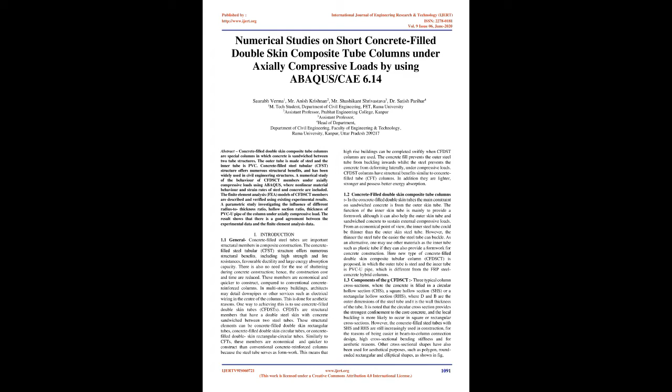Similarly to CFTs, these members are economical and quicker to construct than conventional reinforced concrete columns because the steel tube serves as formwork. This means that high-rise buildings can be completed swiftly when CFDST columns are used. The concrete fill prevents the outer steel tube from buckling inwards whilst the steel prevents the concrete from deforming laterally under compressive loads. CFDST columns have structural benefits similar to concrete-filled tube, CFT, columns. In addition, they are lighter, stronger, and possess better energy absorption.

1.2 Concrete-filled double-skin composite tube columns. In the concrete-filled double-skin tubes, the main constraint on sandwiched concrete is from the outer skin tube. The function of the inner skin tube is mainly to provide a formwork, although it can also help the outer skin tube and sandwiched concrete to sustain external compressive loads. From an economical point of view, the inner steel tube could be thinner than the outer skin steel tube. However, the thinner the steel tube, the easier the steel tube can buckle.

As an alternative, one may use other materials as the inner tube, such as plastic tube, if they can also provide a formwork for concrete construction. Here, a new type of concrete-filled double-skin composite tubular column, CFDSCT, is proposed, in which the outer tube is steel and the inner tube is PVC-U pipe, which is different from the FRP steel-concrete hybrid columns.

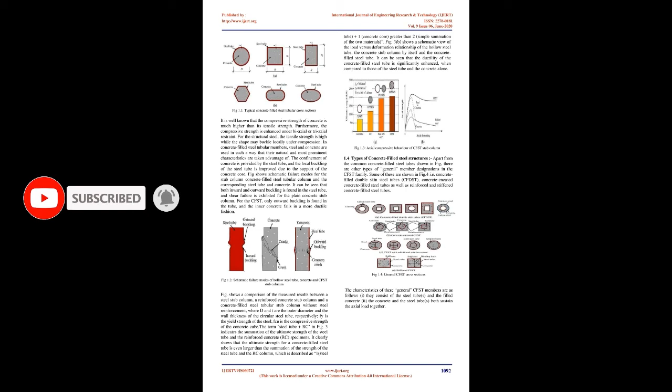1.3 Components of the CFDSCT. Three typical column cross-sections, where the concrete is filled in a circular hollow section, CHS, a square hollow section, SHS, or a rectangular hollow section, RHS, where D and B are the outer dimensions of the steel tube and T is the wall thickness of the tube. It is noted that the circular cross-section provides the strongest confinement to the core concrete, and local buckling is more likely to occur in square or rectangular cross-sections.

However, the concrete-filled steel tubes with SHS and RHS are still increasingly used in construction, for the reasons of being easier in beam-to-column connection design, high cross-sectional bending stiffness, and for aesthetic reasons. Other cross-sectional shapes have also been used for aesthetic purposes, such as polygon, round-ended rectangular and elliptical shapes, as shown in Fig.

It is well known that the compressive strength of concrete is much higher than its tensile strength. Furthermore, the compressive strength is enhanced under biaxial or triaxial restraint. For the structural steel, the tensile strength is high while the shape may buckle locally under compression. In concrete-filled steel tubular members, steel and concrete are used in such a way that their natural and most prominent characteristics are taken advantage of.

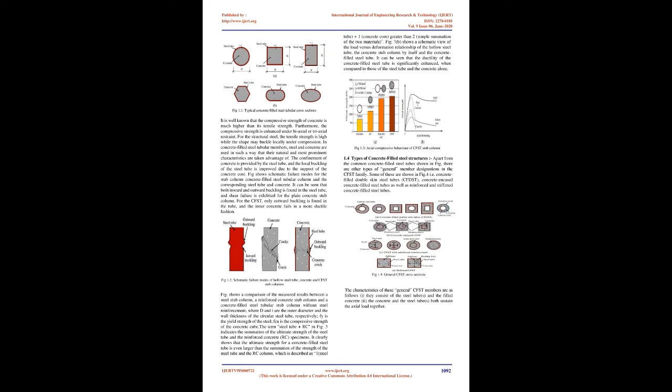The confinement of concrete is provided by the steel tube, and the local buckling of the steel tube is improved due to the support of the concrete core. Fig shows schematic failure modes for the stub column concrete-filled steel tubular column and the corresponding steel tube and concrete.

It can be seen that both inward and outward buckling is found in the steel tube, and shear failure is exhibited for the plain concrete stub column. For the CFST, only outward buckling is found in the tube, and the inner concrete fails in a more ductile fashion.

Fig 3 shows a comparison of the measured results between a steel stub column, a reinforced concrete stub column and a concrete-filled steel tubular stub column without steel reinforcement, where D and t are the outer diameter and the wall thickness of the circular steel tube, respectively. fy is the yield strength of the steel, fcu is the compressive strength of the concrete cube.

The term steel tube and RC in Fig 3 indicates the summation of the ultimate strength of the steel tube and the reinforced concrete, RC, specimens. It clearly shows that the ultimate strength for a concrete-filled steel tube is even larger than the summation of the strength of the steel tube and the RC column, which is described as 1 (steel tube) plus 1 (concrete core) greater than 2, the simple summation of the two materials.

Fig 3b shows a schematic view of the load versus deformation relationship of the hollow steel tube, the concrete stub column by itself and the concrete-filled steel tube. It can be seen that the ductility of the concrete-filled steel tube is significantly enhanced, when compared to those of the steel tube and the concrete alone.

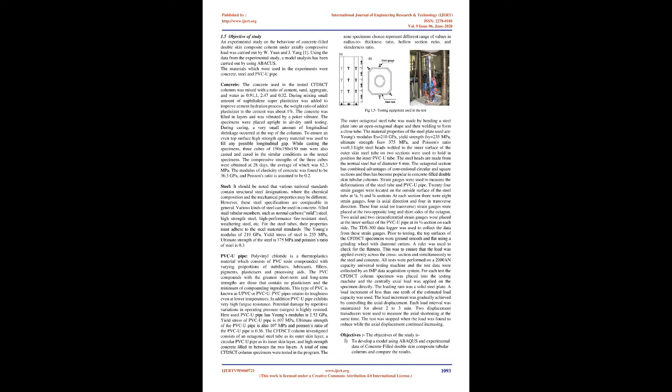Concrete. The concrete used in the tested CFDSCT columns was mixed with a ratio of cement, sand, aggregate, and water as 0.91, 1, 2.47 and 0.32. During mixing, a small amount of naphthalene superplasticizer was added to improve the cement hydration process. The weight ratio of added plasticizer to the cement was about 1%.

The concrete was filled in layers and was vibrated by a poker vibrator. The specimens were placed upright to air dry until testing. During curing, a very small amount of longitudinal shrinkage occurred at the top of the columns. To ensure an even top surface, high-strength epoxy material was used to fill any possible longitudinal gap.

While casting the specimens, 3 cubes of 150 x 150 x 150 mm were also cast and cured in similar conditions as the tested specimens. The compressive strengths of the 3 cubes were obtained at 28 days, the average of which was 62.3 MPa. The modulus of elasticity of concrete was found to be 36.3 GPa, and Poisson's ratio is assumed to be 0.2.

Steel. It should be noted that various national standards contain structural steel designations, where the chemical composition and the mechanical properties may be different. However, these steel specifications are comparable in general. Various kinds of steel can be used in concrete-filled steel tubular members, such as normal carbon, mild steel, high-strength steel, high-performance fire-resistant steel, weathering steel, etc.

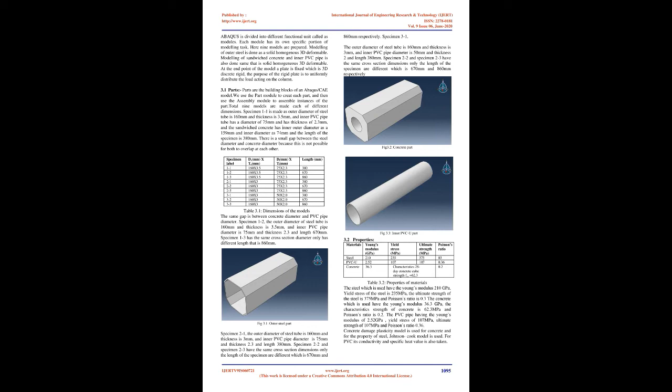Prior to testing, the top surfaces of the CFDSCT specimens were ground smooth and flat using a grinding wheel with diamond cutters. A ruler was used to check for the flatness. This was to ensure that the load was applied evenly across the cross-section and simultaneously to the steel and concrete. All tests were performed on a 2000 kN capacity universal testing machine and the test data were collected by an IMP data acquisition system. For each test the CFDSCT column specimen was placed into the testing machine and the centrally axial load was applied on the specimen directly.

The loading ram was a solid steel plate. A load increment of less than 1/10 of the estimated load capacity was used. The load increment was gradually achieved by controlling the axial displacement. Each load interval was maintained for about 2 to 3 minutes. 2 displacement transducers were used to measure the axial shortening at the same time. The test was stopped when the load was found to reduce while the axial displacement continued increasing.

Objectives: the objectives of the study are: 1. To develop a model using ABAQUS and experimental data of concrete-filled double-skin composite tubular columns and compare the results. 2. Using the ABAQUS model, to study the effect of the following variables on the behavior of CFDSCT: 1. Radius to thickness ratio. 2. Hollow section ratio. 3. Thickness of the PVC-U pipe.

2. Literature review. Dai and Lam, 2010, investigated the axial compressive behavior of short concrete-filled elliptical steel columns by using ABAQUS. A new stress-strain curve for hollow section confined concrete was made. The stress-strain curve obtained by simulation and by experiment was compared and verified. The cross-section of the elliptical hollow section was 150*75 with 3 different thicknesses, 4 mm, 5 mm, and 6.3 mm, and C30, C60 and C100 concrete grades were used. The load axial shortening curve, failure modes, and ultimate load capacity of the section were obtained from numerical models and compared with the experimental results.

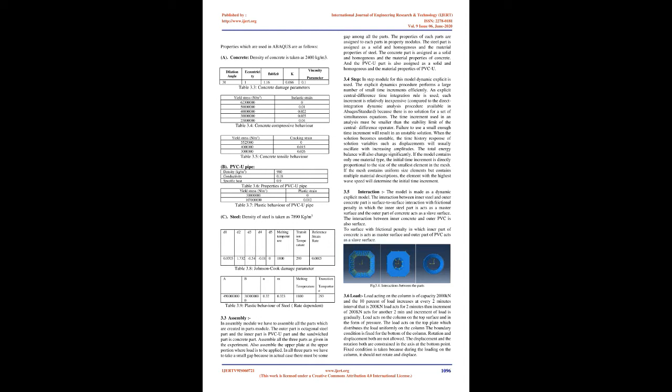Han and Tao, 2007, studied the torsional behaviors of concrete-filled thin-walled steel tubes. ABAQUS software was used for the finite element analysis, FEA, of CFST subjected to pure torsion. A comparison of results calculated using this modeling shows good agreement with test results. The FEA modeling was used to investigate the influence of important parameters that determine the ultimate torsional strength of the composite sections. The parametric studies provided information for the development of formulae to calculate the ultimate torsional strength, as well as the torsional moment versus torsional strain curves of the composite sections.

Han and Su, 2010, tested 8 FRP concrete steel double-skin tubular columns under constant axial load and cyclically increasing flexural loading. The main parameters in the tests were axial load level and number of fiber-reinforced polymer, FRP, layers. The influence of those parameters on the strength, ductility, stiffness, and energy dissipation was investigated. It was found that, in general, FRP concrete steel double-skin tubular columns exhibit high levels of energy dissipation prior to the rupture of the longitudinal FRP.

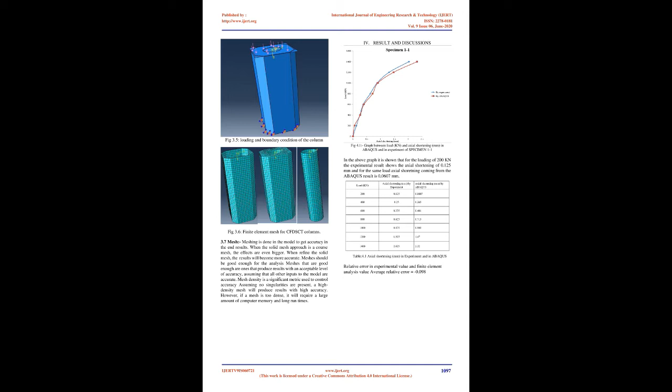Ren and Li, 2011, introduced a new type of composite member, a stainless steel concrete carbon steel double-skin tubular, DST, column. This composite member was expected to combine the advantages of all 3 types of materials, and had additional advantages of aesthetics and resistance to corrosion that outer stainless steel offers. In total 80 specimens were tested. The main parameters of the tests were the sectional type, circular, square, round-ended rectangular and elliptical, the column type, straight, inclined and tapered, and the hollow ratio of the composite section. The results showed that all types of columns behaved in a ductile manner, and the mechanical behavior was similar to those columns with double carbon steel tubes.

Th. Hahn, J. M. Stallings, Y. J. Kong, 2010, did the double-skin concrete-filled tubular column analysis by nonlinear analysis. By using the failure mode of column, the stress-strain diagram was made. And for each failure mode, concrete confining pressure equations were developed. Then the comparison was done between analytical and experimental results. And finally they explained the ultimate strength of double-skin concrete-filled tubular column was more than the sum of the ultimate strength of its component members, that is inner tube, outer tube, and sandwiched concrete.

Zhao and Grzebieta, 2002, studied the plastic collapse behavior of concrete-filled double-skin tube column. The buckling in the outer tube was also studied. And it was found that the experimental and analytical results matched.

Specimen 2:1, the outer diameter of steel tube is 160 mm and thickness is 3 mm, and inner PVC pipe diameter is 75 mm and thickness 2.3 and length 380 mm. Specimen 2:2 and specimen 2:3 have the same cross-section dimensions, only the length of the specimens are different, which is 670 mm and 860 mm respectively.

Specimen 3:1, the outer diameter of steel tube is 160 mm and thickness is 3 mm, and inner PVC pipe diameter is 50 mm and thickness 2 and length 380 mm. Specimen 3:2 and specimen 3:3 have the same cross-section dimensions, only the length of the specimens are different, which is 670 mm and 860 mm respectively.

The steel which is used has Young's modulus 210 GPa. Yield stress of the steel is 235 MPa, the ultimate strength of the steel is 375 MPa and Poisson's ratio is 0.3. The concrete which is used has Young's modulus 36.3 GPa, the characteristic strength of concrete is 62.3 MPa and Poisson's ratio is 0.2. The PVC pipe has Young's modulus of 2.52 GPa, yield stress of 107 MPa, ultimate strength of 107 MPa and Poisson's ratio 0.36.

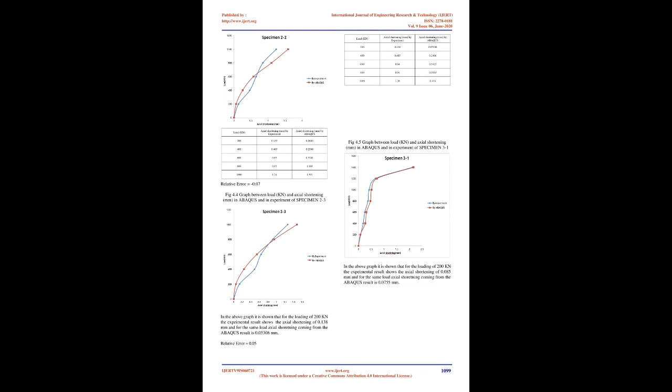Concrete damage plasticity model is used for concrete, and for the property of steel, Johnson-Cook model is used. For PVC, its conductivity and specific heat value is also taken. 3.3 Assembly. In assembly module we have to assemble all the parts which are created in parts module. The outer part is octagonal steel part and the inner part is PVC-U part and the sandwiched part is concrete part. Assemble all the three parts as given in the experiment.

Also assemble the upper plate at the upper portion where load is to be applied. In all three parts we have to take a small gap because in actual case there must be some gap among all the parts. The properties of each part are assigned in the property module. The steel part is assigned as solid and homogeneous with the material properties of steel. The concrete part is assigned as solid and homogeneous with the material properties of concrete. And the PVC-U part is also assigned as solid and homogeneous with the material properties of PVC-U.

3.4 Step. In step module for this model dynamic explicit is used. The explicit dynamics procedure performs a large number of small time increments efficiently. An explicit central difference time integration rule is used. Each increment is relatively inexpensive compared to the direct integration dynamic analysis procedure available in ABAQUS/Standard, because there is no solution for a set of simultaneous equations.

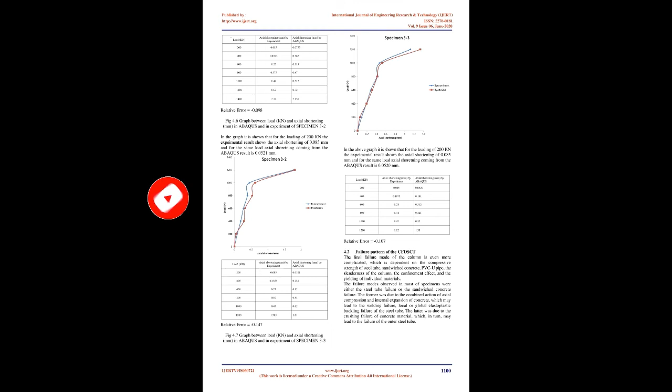The time increment used in an analysis must be smaller than the stability limit of the central difference operator. Failure to use a small enough time increment will result in an unstable solution. When the solution becomes unstable, the time history response of solution variables such as displacements will usually oscillate with increasing amplitudes. The total energy balance will also change significantly. If the model contains only one material type, the initial time increment is directly proportional to the size of the smallest element in the mesh. If the mesh contains uniform size elements but multiple material descriptions, the element with the highest wave speed will determine the initial time increment.

3.5 Interaction. The model is made as a dynamic explicit model. The interaction between inner steel and outer concrete part is surface-to-surface interaction with frictional penalty, in which the inner steel part acts as a master surface and the outer part of concrete acts as a slave surface. The interaction between inner concrete and outer PVC is also surface-to-surface with frictional penalty, in which inner part of concrete acts as master surface and outer part of PVC acts as a slave surface. Fig. 3.4, interactions between the parts.

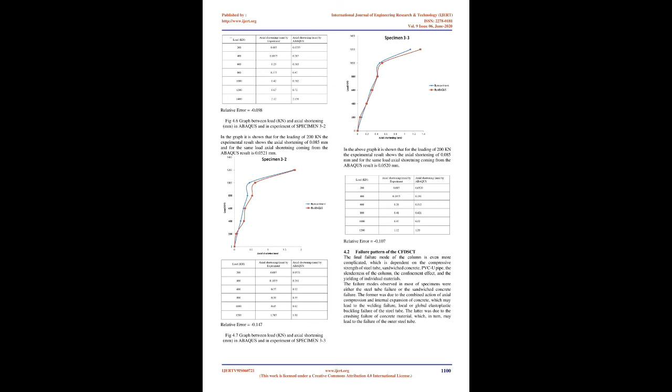3.6 Load acting on the column is of capacity 2000 kN and 10% of load increases at every 2 minutes interval, that is 200 kN. Load acts for 2 minutes, then an increment of 200 kN acts for another 2 minutes, and the load increases gradually. Load acts on the column on the top surface in the form of pressure. The load acts on the top plate, which distributes the load uniformly on the column. The boundary condition is fixed for the bottom of the column. Rotation and displacement both are not allowed. The displacement and the rotation both are constrained in the axis at the bottom point.

Meshes should be good enough for the analysis. Meshes that are good enough are ones that produce results with an acceptable level of accuracy, assuming that all other inputs to the model are accurate. Mesh density is a significant metric used to control accuracy. Assuming no singularities are present, a high-density mesh will produce results with high accuracy. However, if a mesh is too dense, it will require a large amount of computer memory and long run times.

For results and discussions. 4.2 Failure pattern of the CFDSCT. The final failure mode of the column is even more complicated, which is dependent on the compressive strength of steel tube, sandwiched concrete, PVC-U pipe, the slenderness of the column, the confinement effect, and the yielding of individual materials. The failure modes observed in most of the specimens were either the steel tube failure or the sandwiched concrete failure.

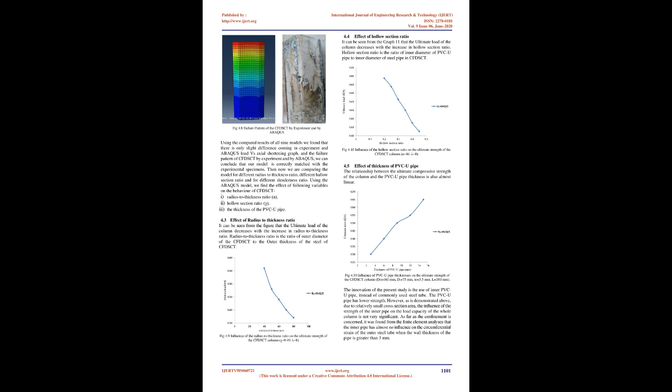4.3 Effect of radius to thickness ratio. It can be seen from the figure that the ultimate load of the column decreases with the increase in radius to thickness ratio. Radius to thickness ratio is the ratio of outer diameter of the CFDSCT to the outer thickness of the steel of CFDSCT.

4.4 Effect of hollow section ratio. It can be seen from graph 11 that the ultimate load of the column decreases with the increase in hollow section ratio. Hollow section ratio is the ratio of inner diameter of PVC-U pipe to inner diameter of steel pipe in CFDSCT. 4.5 Effect of thickness of PVC-U pipe. The relationship between the ultimate compressive strength of the column and the PVC-U pipe thickness is also almost linear.

The innovation of the present study is the use of inner PVC-U pipe, instead of the commonly used steel tube. The PVC-U pipe has lower strength. However, as demonstrated above, due to relatively small cross-section area, the influence of the strength of the inner pipe on the load capacity of the whole column is not very significant. As far as the confinement is concerned, it was found from the finite element analyses that the inner pipe has almost no influence on the circumferential strain of the outer steel tube when the wall thickness of the pipe is greater than 3 mm. Conclusion.

1. The values of axial shortening of different models by ABAQUS match the experimental values with negligible deviation. 2. Under the action of a compressive load, the CFDSCT column exhibits an initial linear elastic deformation, followed by a nonlinear elastoplastic deformation until the load reaches a peak point. 3. The increase of the wall thickness, greater than 3 mm, of inner PVC-U pipe has almost no influence on the action to concrete confinement, although it could marginally increase the ultimate compressive load of the CFDSCT column.

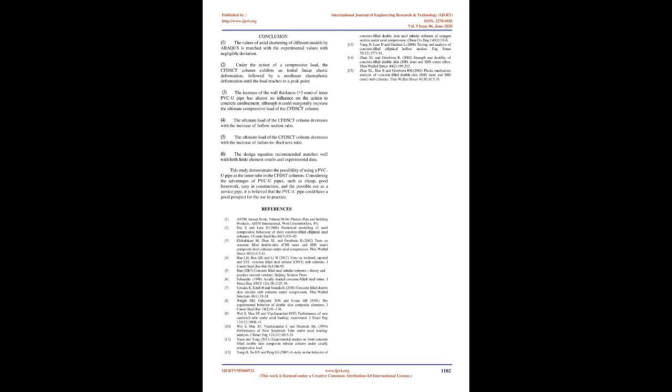4. The ultimate load of the CFDSCT column decreases with the increase of hollow section ratio. 5. The ultimate load of the CFDSCT column decreases with the increase of radius to thickness ratio. 6. The design equation recommended matches well with both finite element results and experimental data. This study demonstrates the possibility of using a PVC-U pipe as the inner tube in CFDST columns. Considering the advantages of PVC-U pipes, such as being cheap, good formwork, easy in construction, and the possible use as a service pipe, it is believed that the PVC-U pipe could have a good prospect for use in practice.